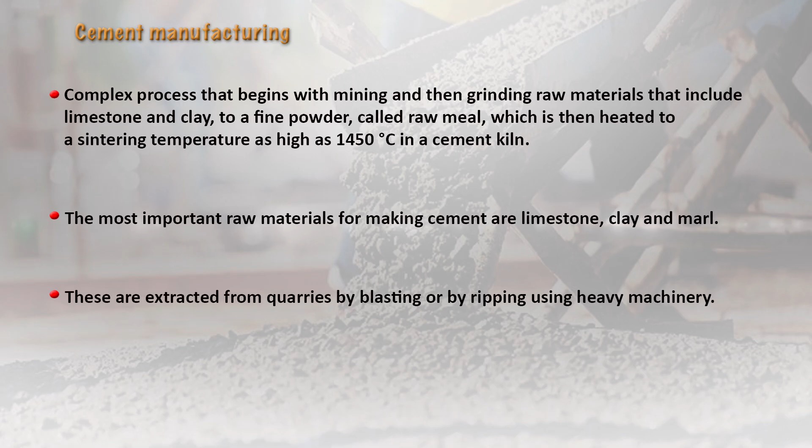The raw materials used for making cement normally include limestone, clay and marl, and these are extracted from quarries by blasting or by ripping using heavy machinery.

In India, the limestone reserves are quite a lot. You find them in Meghalaya, and in certain southern regions also we find a good amount of limestone. There are a lot of good companies manufacturing cement, and very good ones even in the south of India.

They actually have proper environmental rules, and they even convert the fly ash and other materials coming from their processing, recycling and reusing them for other purposes, maybe for roads or for making eco-friendly blocks for construction. So even the final products can be converted into non-toxic and useful products later on.

Basically cement is a binder, a binding agent. It is a substance used for construction that can set, harden and adhere other materials to bind them together. You would have seen in construction places, even when constructing your own houses or companies, cement is being used.

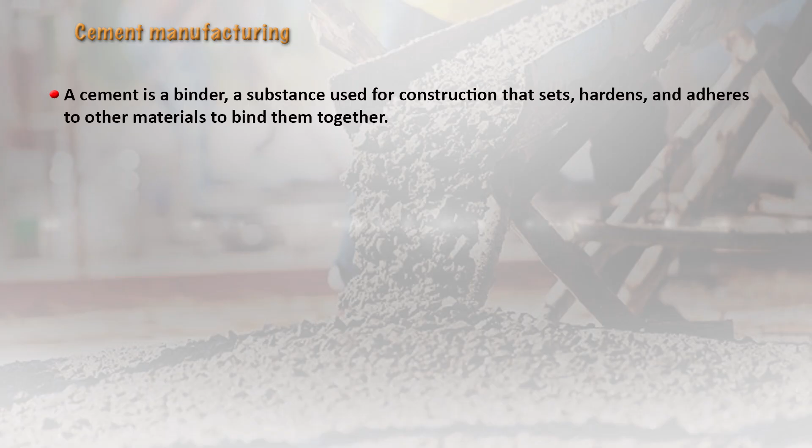First you will see the little bit of red soil or clayish material, then you use the gravel, then the cement. All this is mixed together, and sometimes even a binding agent like Fevicol powder is used. Then they are all mixed with water, in a consistency that can hold the blocks or bricks together. Here you find clay bricks put together and bound in between with this cement plastering material, and then the outer plastering is done.

Also for the roofing, where lintels have to be done for the roofing of houses, big machines come in - the ready-made cement and gravel mixer, where all materials are put in and kept rolling in a mechanized way. Then it has special equipment where the mixture can be spread out evenly on top of the buildings, on the beams, and they bind together, and after hardening, it becomes a very solid, airtight and waterproof thing used in construction.

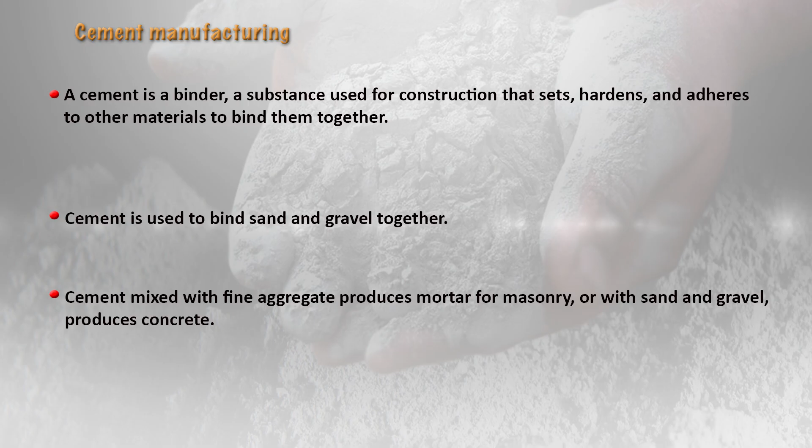So basically cement is used to bind the sand and the gravel together - it is a binding agent, and with this fine aggregate it can produce the concrete used for roofs and other parts of building areas. The initial calcination reaction in the production of cement is responsible for about 4% of global carbon dioxide emissions.

So it is not that the cement industry is free of the adverse environmental impacts that they are creating. It is responsible for a certain amount of global carbon dioxide emissions, contributing to greenhouse gases and global warming. The overall process is responsible for 8% of global carbon dioxide emissions.

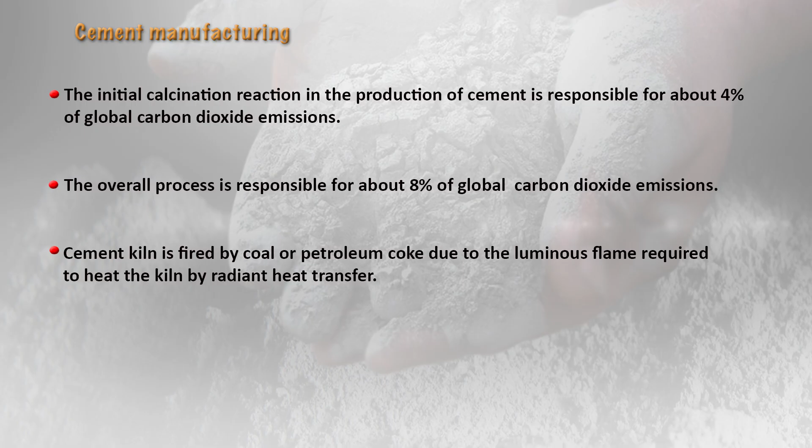The cement kiln is fired by coal or petroleum coke, and that is due to the flame required to heat the kiln by radiant heat transfer. As a result, the production of cement is a major contributor to climate change.

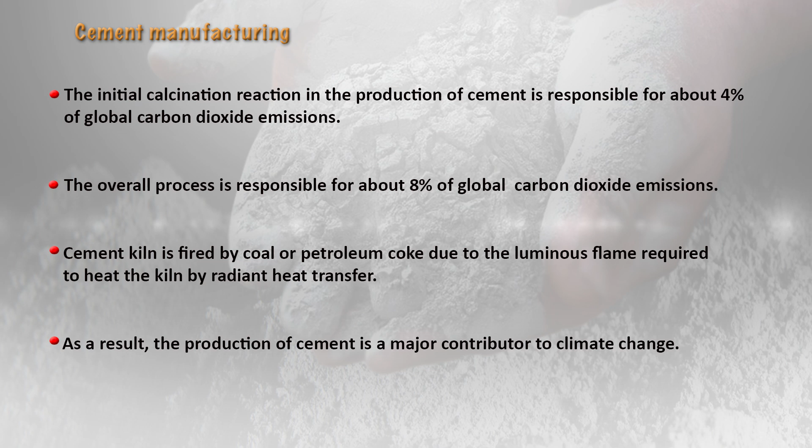The most common type of cement is hydraulic cement, and this hardens by hydration of the clinker minerals when water is added. The hydraulic cements include Portland cement, made of a mixture of silicates and oxides, which is what we normally use. The silicates are responsible for the cement's mechanical properties.

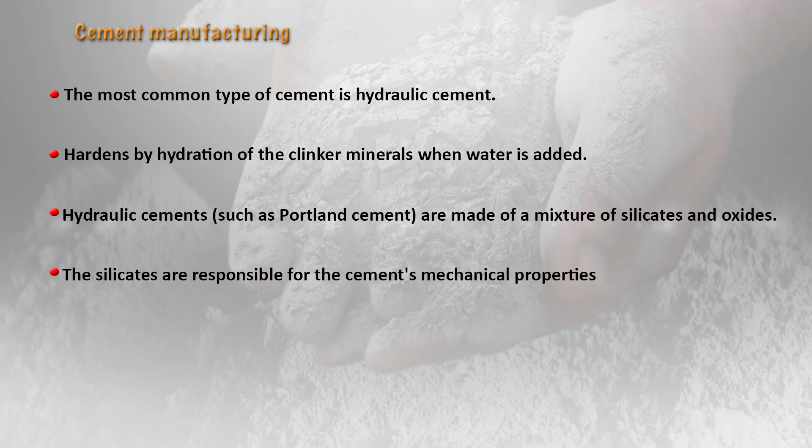Now when we are conducting an environmental impact assessment survey of such cement projects, we need to identify the positive and negative alterations of the natural and human environment which may affect the quality of life, as well as present and future options for sustainable social and economic development in the area of influence.

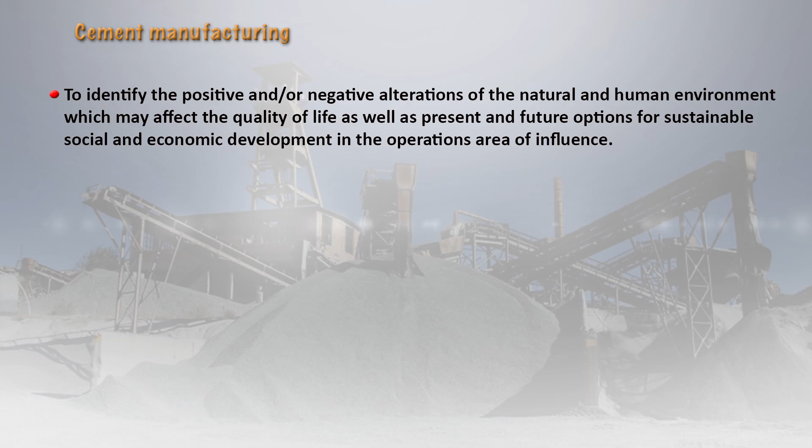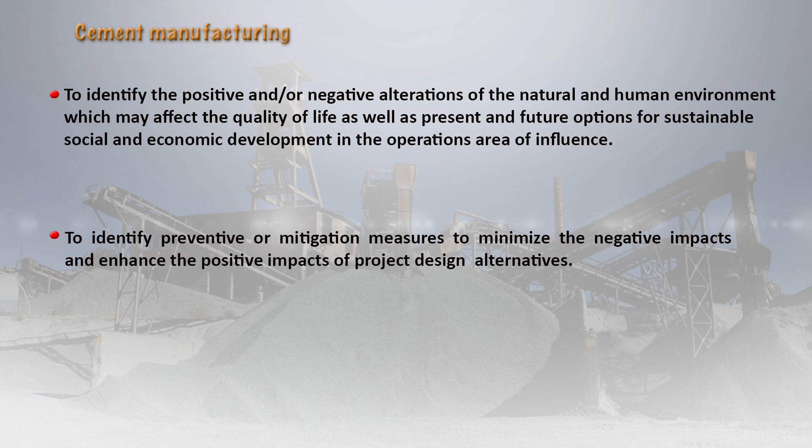We need to identify and discuss the preventive and mitigation measures to minimize the negative impacts and enhance the positive impacts of the project design alternatives. We need to determine whether the proposed operation is the optimal or at least a viable solution to the development needs it addresses, after the costs and benefits of the impacts, mitigated or not, are internalized, and recommend a course of action including preventive or mitigation measures after comparing alternatives, including that of no action.

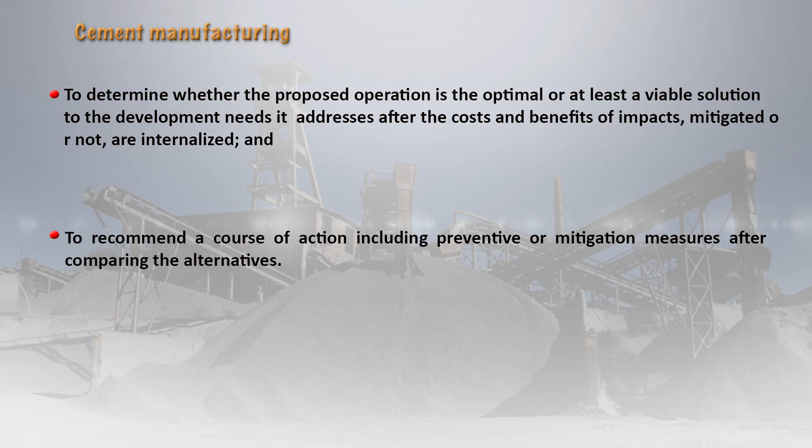A description of the proposed operation and its objectives needs to be outlined. This includes an analysis of the project involving a description and evaluation of the impact, the cost-benefit analysis of the considered alternatives including a no-project option, the rationale for selecting the proposed alternative, and description of its impacts. Whatever you are submitting, that project should contain all these aspects.

Then there should be a description of the institutional and legal environmental framework associated with the project, including specific legal requirements if required.

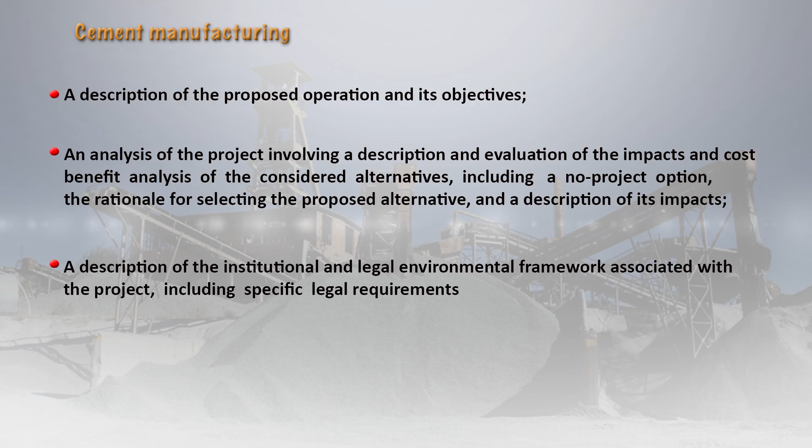Then the human and environmental risk assessment needs to be written down clearly. Risk assessment can focus on the consequences to the health of plant workers and nearby residents resulting from operational accidents or emergencies, because even during the operational phase or the construction phase, certain accidents can occur.

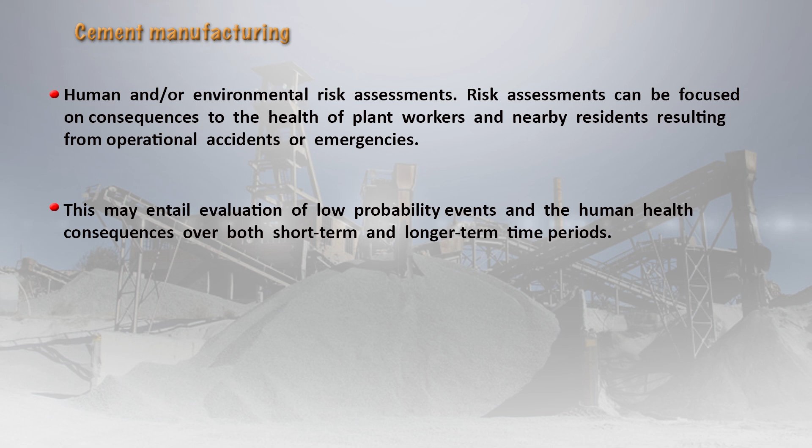So whether the health of plant workers will be affected, whether there can be human health problems in nearby areas, whether people will be affected. This may entail evaluation of low probability events and human health consequences over both short term and long term time periods.

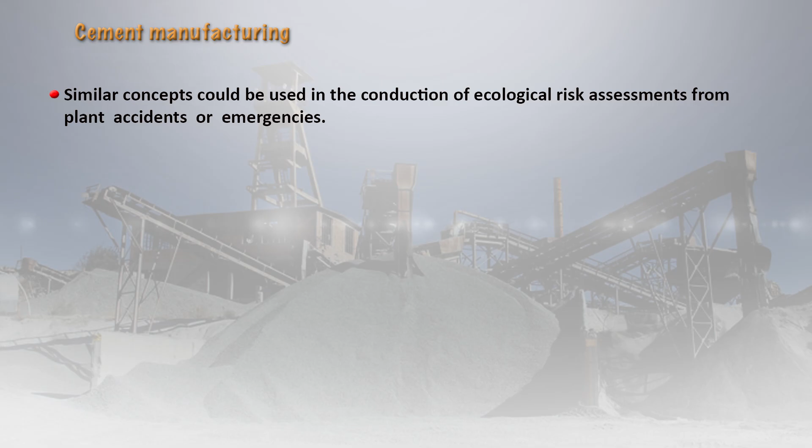Similar concepts could be used in conducting the ecological risk assessment from plant accidents or emergencies. Such assessment encompasses evaluation of the probability and resulting adverse effects on non-human terrestrial or aquatic populations or related ecological systems.

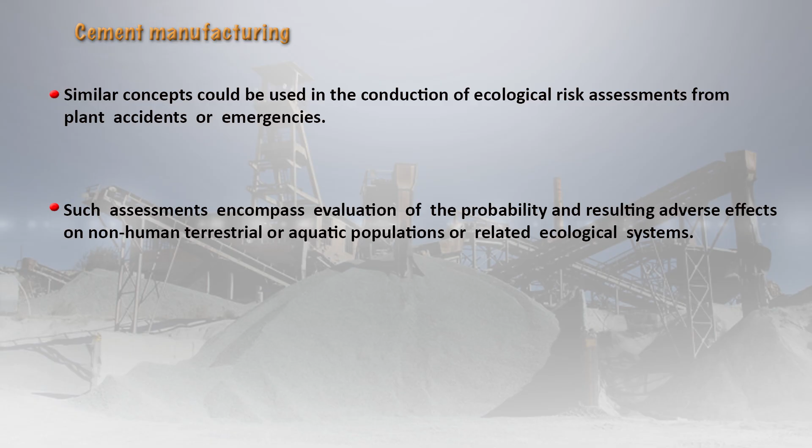Then the resettlement plan - you need to analyze and write down the risk assessment regarding the engineering, health and environmental aspects, whether there is any emergency response and contingency plan included in the project, the industrial hygiene workers can follow, whether there is a worker safety plan, the public consultation plan, because you can even discuss with the public and with people who have years of experience.

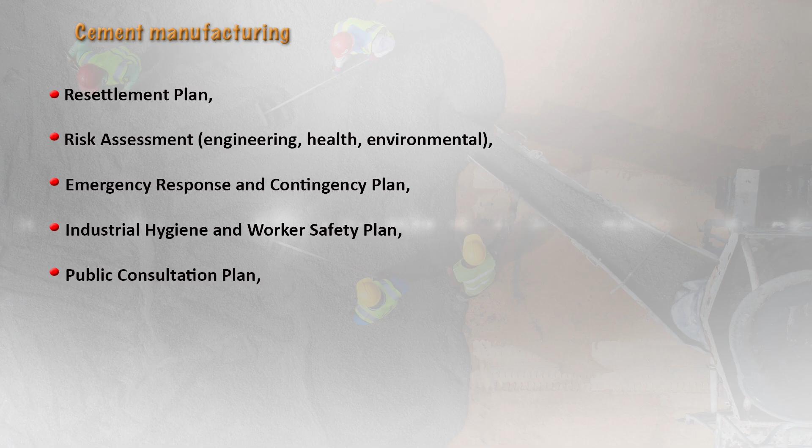The environmental site assessment will consist of evaluating the existing soil, the geology of that area, the groundwater, and surface water contamination at the proposed plant sites. So the site assessment is very much required. That forms the first part before the entire study is conducted.

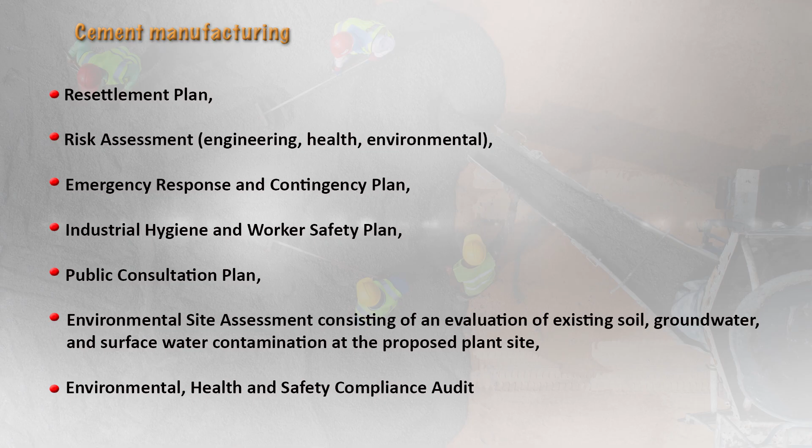Then the environmental health and safety compliance audit also needs to be done. Then the description of the proposed built development or land use is expected, such as the port facility, chalk pits, limestone, clay, pyrite, gypsum and sand sources and their reclamation.

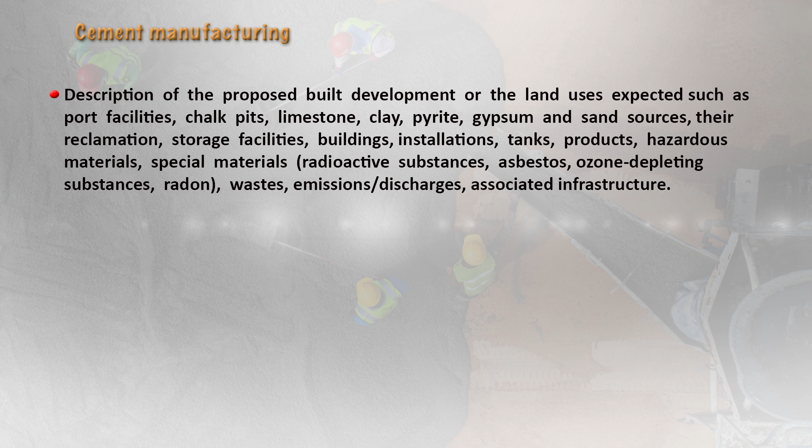Storage facilities like raw material, product and waste, buildings, installations from materials coming out from the kilns, mills, grinders, separators, heat exchangers, stacks, tanks placed above ground and underground, other hazardous materials, special materials such as radioactive substances, asbestos, ozone depleting compounds, radon, other waste emissions and discharges and the associated infrastructure. On all these aspects, a detailed description has to be given.

Then the location of all the facilities, direct, indirect and associated.

For example, the transport of raw materials - from where we will transport the raw material, how the finished product will also be transported, the source of power, and the appropriate quarry operations. So these tools, techniques and methodology of operation all need to be described clearly.

One important thing is the reason and need for the development - why this project has to come up and what is the need for it - and also the employment opportunities it can give, like how much employment it can provide to the residents and population out there.

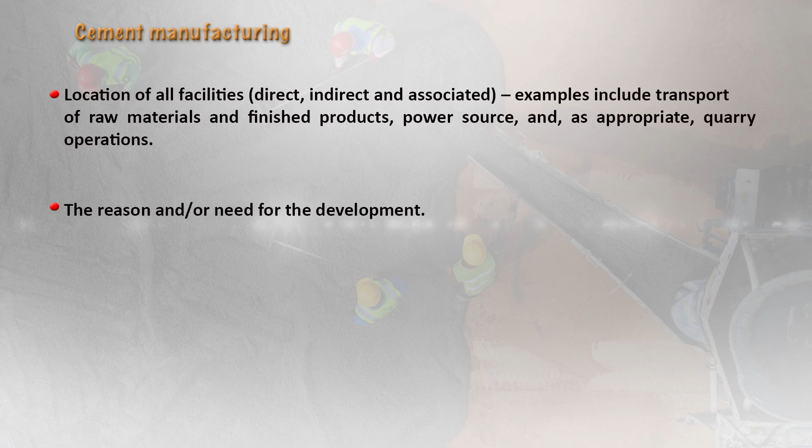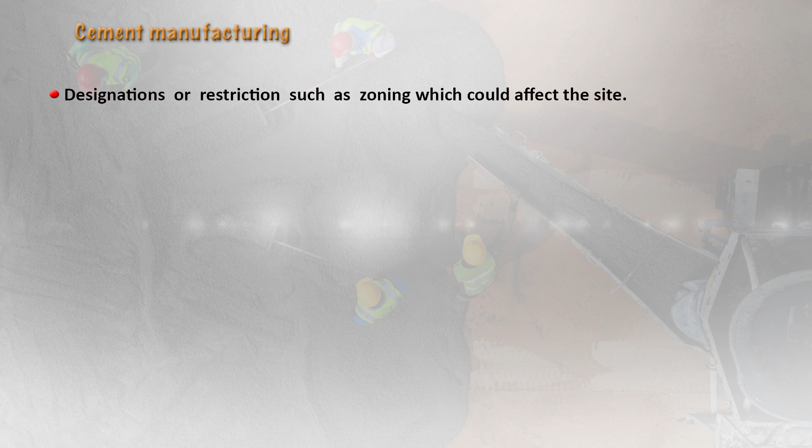Then the designation or restrictions such as zoning which can affect the site, because if there is some environmental impact that can occur, then whether any specific zoning has to be carried out needs to be determined. You can also determine if there are any protected zones in the surrounding area.

For example, if there are important nature reserves, drinking water sources that local people are using, groundwater reserves, surface water reserves, or recreational areas like parks where children or the elderly use for yoga or other recreational activities - all this can be affected by the proposed development.

So these also need to be written down - baseline studies have to be carried out to determine whether these kinds of reserves and areas exist before the proposed development.

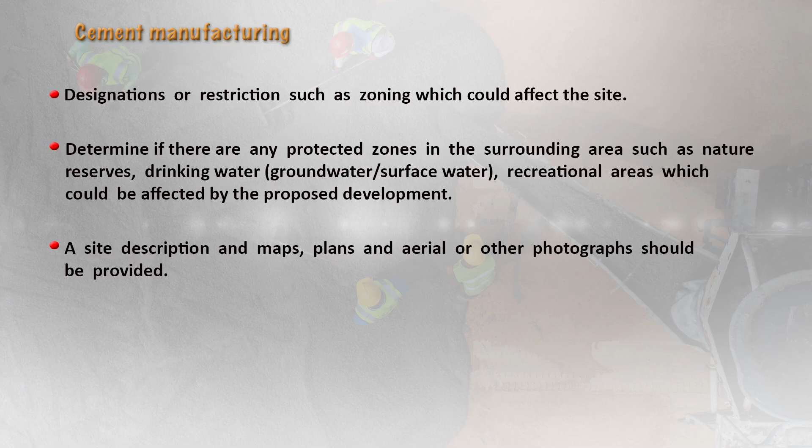Now the site description will be carried out using maps and plans, and aerial photographs can be used and provided. Geographical information systems can also be used, and remote sensing, so that the entire area can be mapped out and photographed well for proper planning and usage.

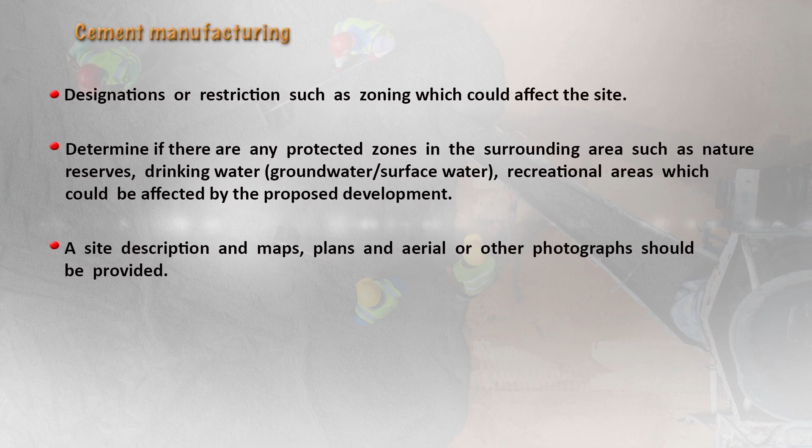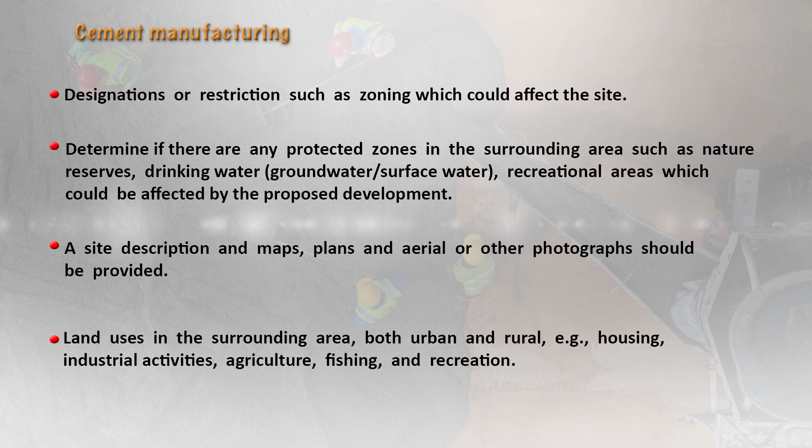The land use in the surrounding area, both urban and rural - for example housing, industrial activity, agriculture, fishing and recreation - this has to be written down.

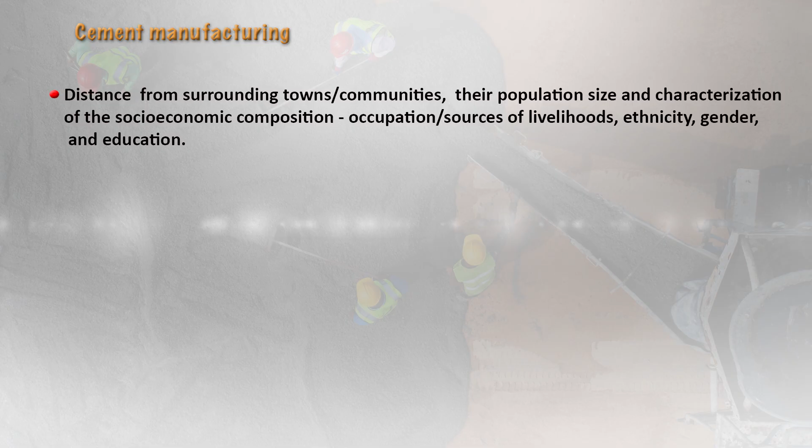Then the distance from the surrounding towns and communities - wherever the project site is going to be carried out, what is the distance from that place to the surrounding town or community, and in that town or community, what is the population size, the characterization of the socio-economic composition, like what employment they are doing, what occupations they are engaged in, and the sources of their livelihood.

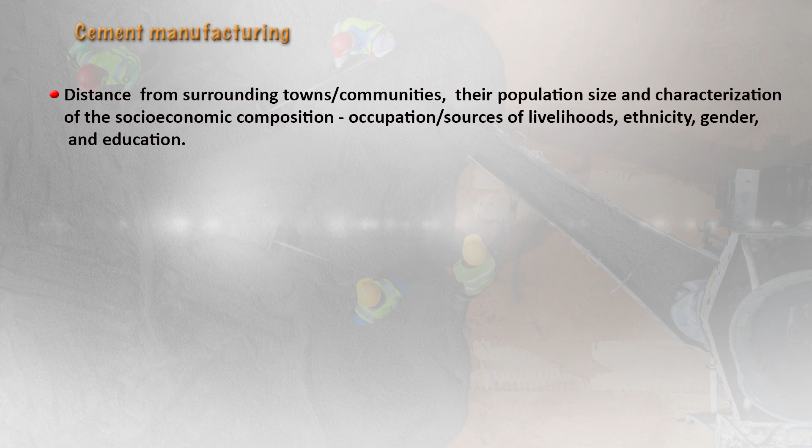For example, are they using aquaculture, or doing basket weaving, jute manufacturing, and such activities? Are they involved in agricultural activities? Are they doing coconut farm rearing, with those fibers used for the carpet industry? So what kind of occupation they are doing, or are people employed in the government sector, working in companies or educational institutions.

Then how many health clinics are there in that area - that is also important. We need to know the ethnicity there, the tribal populations inhabiting that area, because they may have their own roots tied to their culture and society.

For example, in tribal places, people will always watch - even if you visit any cave or limestone zone area - what kind of things you are bringing out of that area. For example, any animal bones that can be used in jewelry or other activities, or whether any precious metal is being taken out of that place, because then they will all start surrounding you.

They will not allow you to take even the water, because they will think it is being sourced or used for some other purpose. So local residents also have to be taken into consent and consideration, and detailed discussions have to be done with local communities before formulating any of these projects, and they should not be affected by any internal motive.

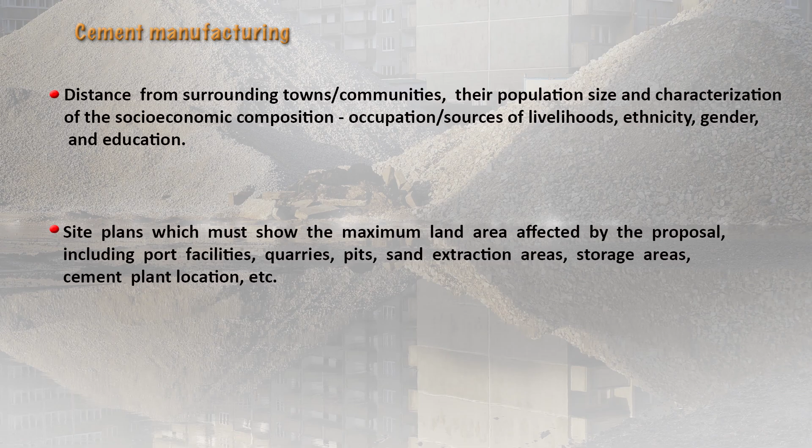The site plans must show the maximum land area that will be affected by the proposal. That can include the port facilities, quarries, pits, and materials like shale, chalk, limestone, pyrite, gypsum - what kind of mineral is going to be mined out and used in this project - as well as sand extraction areas and the storage area.

Because it is not just that the limestone and cement manufacturing happens in one step - even in processing, at every stage you take material out, you will store that part in an area, then it will again be processed further using mechanized equipment.

Then the cement plant location, this also needs to be detailed and outlined. Then the layout plan for the development showing buildings, stacks, storage area for the raw material and waste, the roads, then the parking facilities, infrastructure including all the utilities such as fuel filling station, the power supply, the water supply.

Because if you have seen the cement industry, they will have these kilns and long tractors, mechanized belts and conveyors where things are transported from one part to another. And so even there, they will be operating on power supply, certain diesel or certain generators. So where is this infrastructure power going to come from, are there any fuel filling stations nearby that they can use for their activities. Then water also is required in large amounts, so the water supply, from where are they going to source the water from.

Then the elevations, the cross sections, the plans of all the built development which are supported by photos and other similar methods, that should also show the visual appearance of the area being proposed. Then a description of the extent and types of the industrial development proposed. This should be taken into account.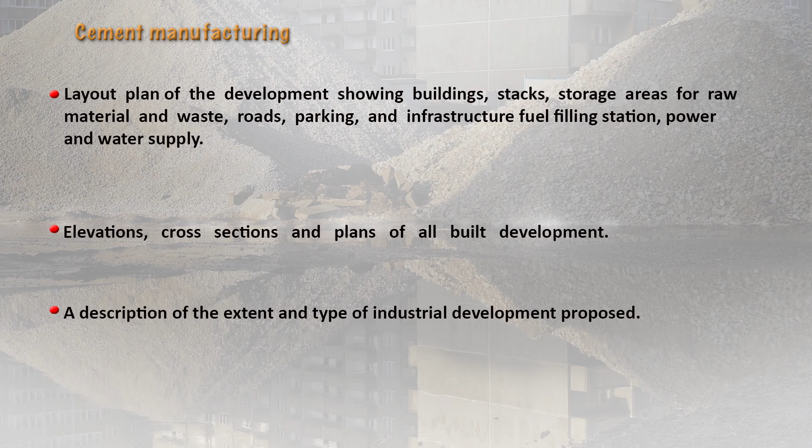Then the flow chart of the proposed activity and the information on the input rate, for example the raw material, the water, the chemicals that are going to be used, then the output rates, the wastewater, the solid, the hazardous waste and the air emissions. So maybe flow charts and network diagrams can be used in order to formulate this.

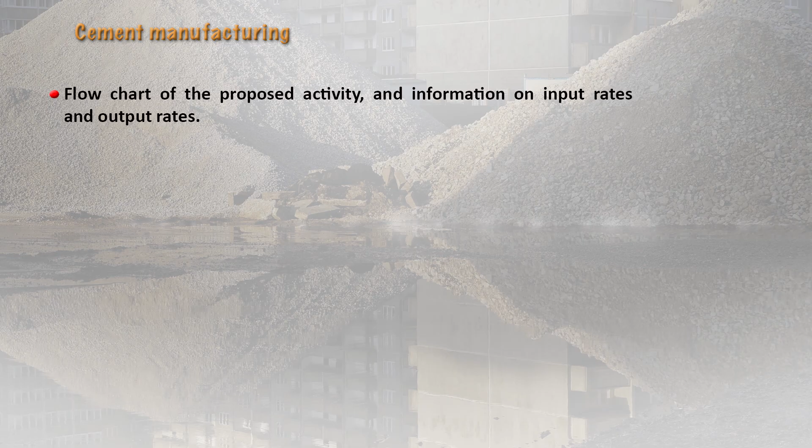And in the cement industry, a lot of wastewater is being released. So even this wastewater, is there any primary and secondary treatment that is going to be done, and then will that be discharged? That also needs to be described.

Then in that wastewater treatment, how is the treatment going to be done? Whether physical screening process is used, whether large screens and grids are available, and whether any treatment plant is available, whether biological treatment is going to be done, chemical treatment using alum and others, or coagulation is going to be done. So what type of chemicals will be employed?

In the same way, in the biological treatment also, are the facilities existing? Can they be done? For the air emissions, do they have any stack filters? Do they have electrostatic precipitators, or any damping equipment where the particulate material or the emissions can be substantially reduced? These also need to be written down and described clearly.

Sand, limestone, clay, pyrite, gypsum and chalk extraction activities, water catchments, port facilities, transportation, storage of the raw material, cement processes which are basically the grinders, the preheaters, the pre-calciners, the kilns, then the storage silos, parking facility, packing facilities, everything. This has to be outlined clearly.

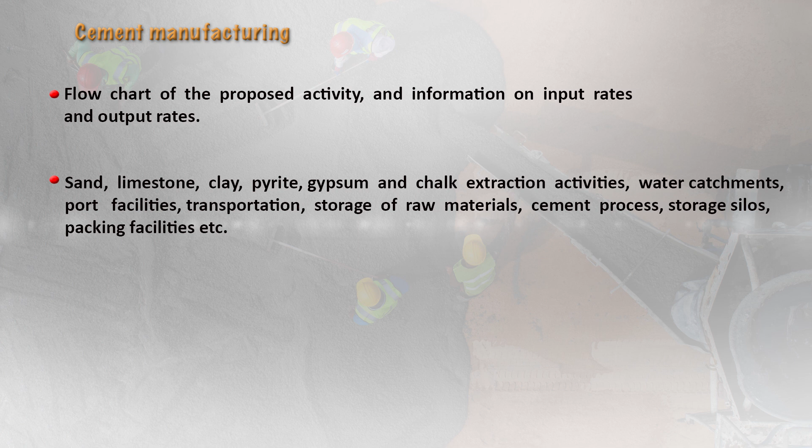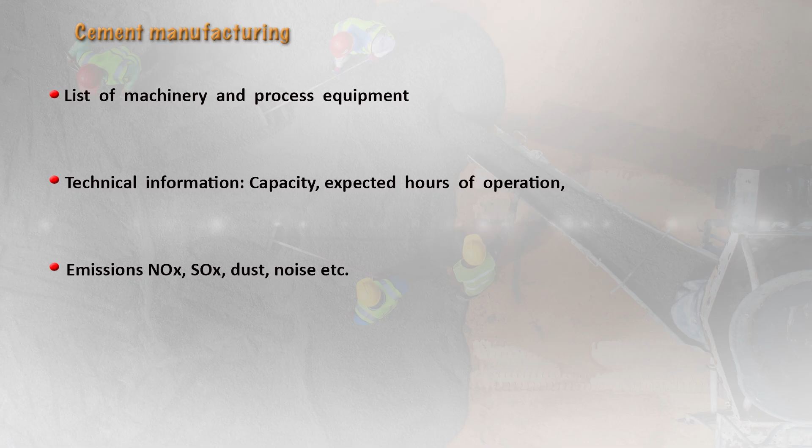Then they need to list the machinery and the process equipment. Technical information has to be given according to the capacity, the expected hours of operation, then the emissions regarding nitrogen oxides, sulfur oxides, dust and also the noise levels that will be liberated as a result of these project activities.

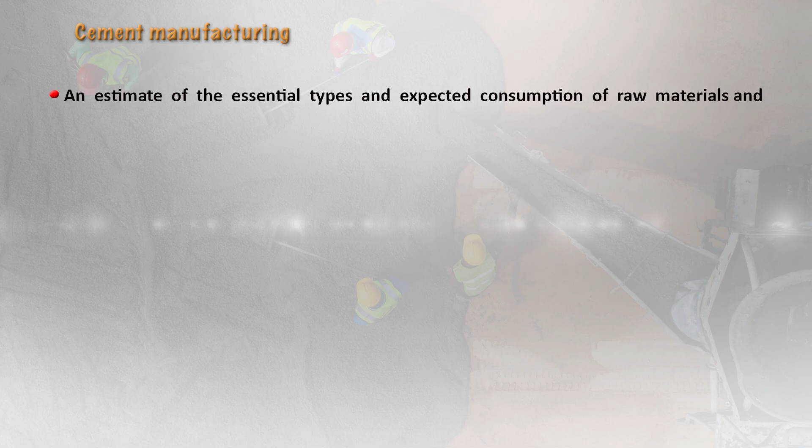An estimate of the essential types and expected consumption of the raw material. So what are the types of raw material that are going to be used, and the amount of expected consumption, the amount that will also be used in the process.

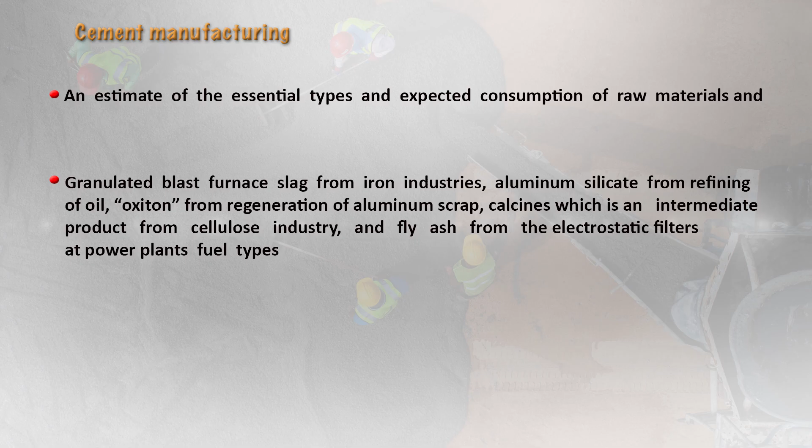The granulated blast furnace slag from the iron industry, aluminum silicate from the refining of oil, oxiton, the regeneration of aluminum scrap, calcines which is an intermediate product from the cellulose industry, fly ash from the electrostatic filters at the power plant, fuel types. So all this needs to be taken into account, and these are certain examples that have been taken from industries that have conducted certain EIAs.

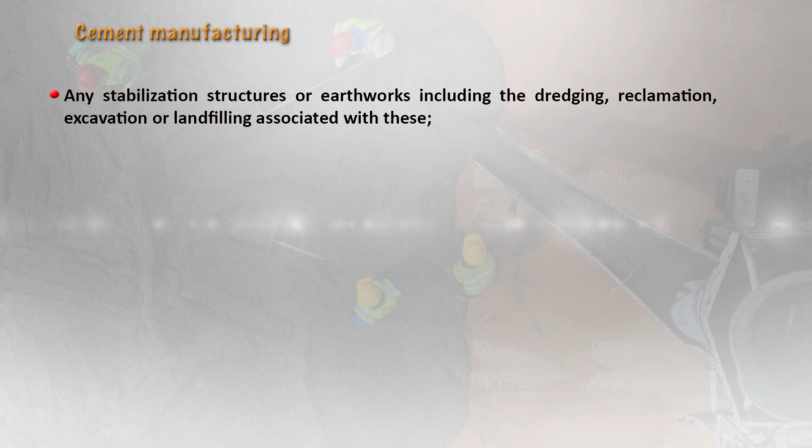Then, whether any stabilization structures or earthworks including dredging, reclamation, excavation or land filling associated with these are being done, the quantities of material to be moved to or from the site, the method of disposal of the excess material, the sources of material to be brought to the site.

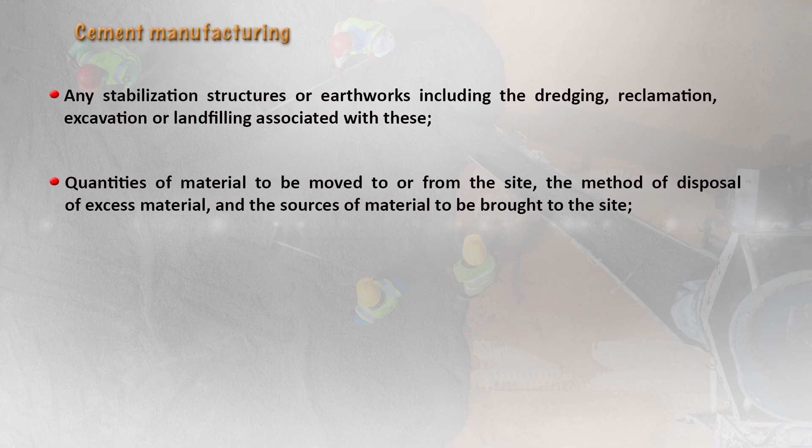Details of the construction workforce, expected numbers, the work camps in the construction period, like how many people will be employed there, how many the company is going to employ, the construction workforce, the expected number, and whether they are going to work in shifts, then the camp arrangement, how are they going to stay, all this during the construction period, it should be described clearly.

Then details of any emergency, evacuation and security plan. In case of any blast, is the health of those people going to be affected? So will there be any medical camp, any medical center, doctors or nurses or medical personnel employed there?

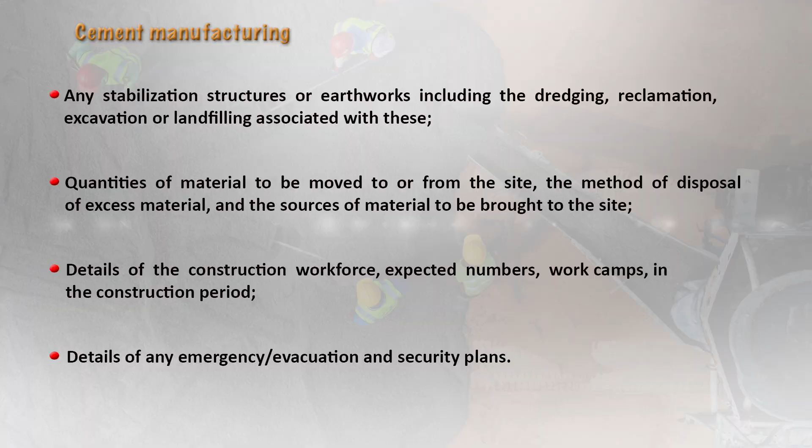The stockpiling of medicines and certain first aid measures have to be there. On site, 24-hour availability of doctors and nurses should be available. In case of any problem, whether there is any safety issue, an alternate evacuation route should exist so that people can follow it and move out. Otherwise, large chunks of rocks and such hazards can hamper their health and survival.

Finally, the land characteristics, the air quality, the water quality, the geology, the soils, and the habitats must be assessed. In the habitats, the terrestrial and aquatic habitats need to be assessed, checking whether there are any endangered species in that area, or any national parks and protected areas of interest. All this has to be taken into account.

Social services such as availability of surrounding clinics, hospitals, schools, sanitation facilities, water treatment and landfills have to be noted down. The water bodies and surface water, for example rivers, lakes and canals, and their use like fishing, water supply, navigation and irrigation.

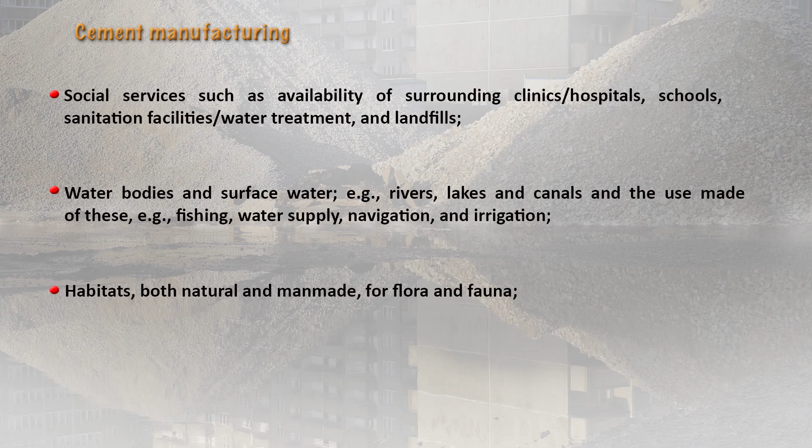The habitats can be natural habitats as well as man-made habitats for the flora and the fauna. They also have to be described, whether they exist and how they will be tackled and cared for well.

This is an example of an EIA of a proposed cement plant which was to come up in southwestern Nigeria. It was done by scientists in the year 2013 and focused on the EIA of the cement plant in southwestern Nigeria, where they were manufacturing Portland cement which causes environmental pollution.

They suggested that dust, noise, gases and vibration can occur during blasting in the quarries, and a good amount of carbon dioxide is also released.

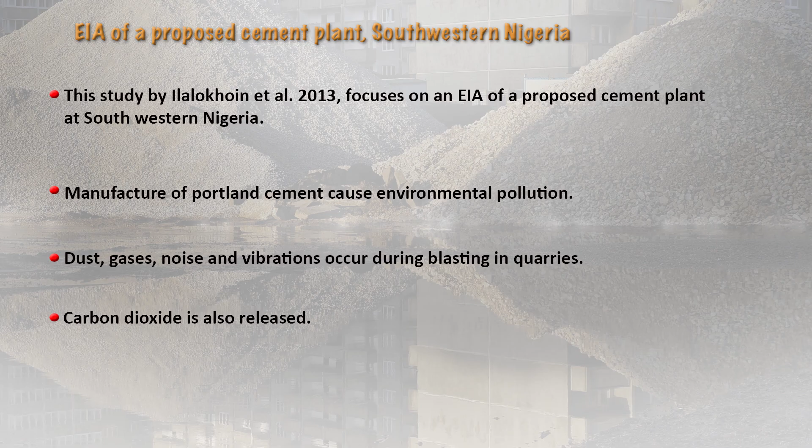Their study reported that soil erosion will occur as the topsoil becomes exposed due to bush clearing and excavation. There will also be a loss of flora and fauna, with significant impacts on the ecology and biodiversity of the area, and loss of the vegetation canopy will also occur.

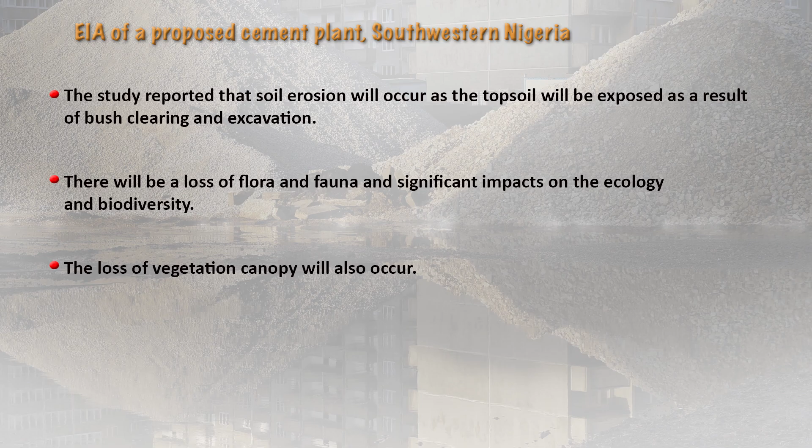Dust can be released from point sources or diffused sources. This cement dust can affect the health of employees working in the plant and also the nearby communities. Therefore, mitigation measures such as electrostatic precipitators and fabric filters will have to be installed.

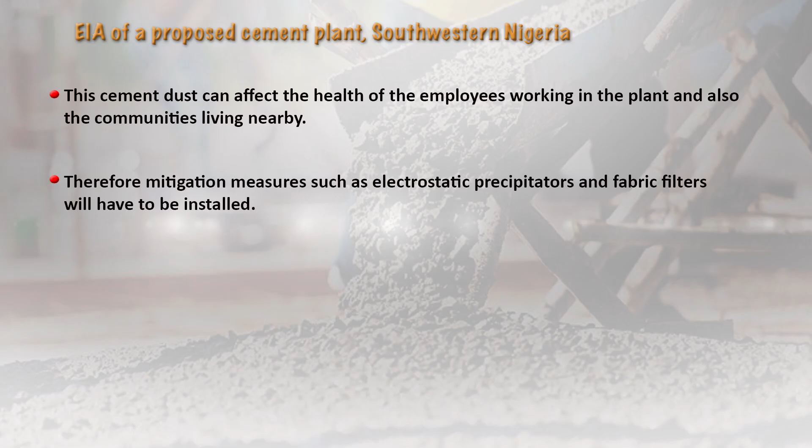The operation phase will create significant noise pollution, so sufficient hearing protection should be provided. For example, ear mufflers, helmets, and eye goggles should be provided to protect the eyes and ears during the operation and construction phases for workers in that region.

The potential sources of vibration include blasting in the quarries, piling during construction, road traffic and heavy machinery. These can also cause distress among the communities, and these were some of the main conclusions of their study. So that was everything about the environmental impact assessment of a cement industry.

Now let us briefly describe impact assessment due to tourism. We are all fond of tourism, and when people migrate from one place to another, they like to take a break from their normal activities. Tourism can be of various types: religious tourism, environmental tourism or ecotourism, or general tourism like meeting people, understanding and appreciating different cultures, learning a different language, and experiencing the languages, culture, dressing style, cuisine and so on.